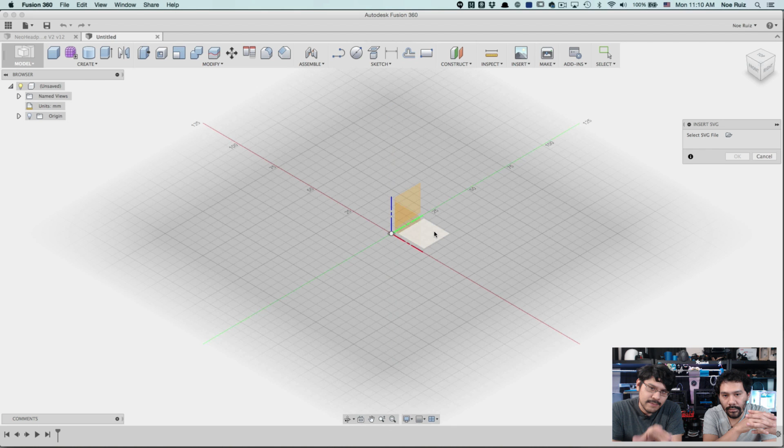Now, importing into Fusion, here's where you have to have a little bit of... here's some caveats. It's under Insert, go to Insert SVG, and then you have to pick your plane. In this case, I'm just going to pick the bottom. Next thing you've got to do is click on that folder icon right next to Select SVG File, navigate to it, pick it, and make sure it's the right one. I have a couple of them there, so make sure it's the right one.

When you hit that button, you might think it's wrong, and I'm moving it around here using that little square. That's the freeform mover. I would avoid doing that because most of the time you're going to want to do something very specific, so increment happens through the arrow manipulators. That little triangle thing I selected was the scale. You can scale it if you want, but again, I recommend doing all that before you import it.

Here's one of the weird things. I'm just moving it around, showing you what different things are to move it. I would think that moving that would have a snap feature. It doesn't snap. It probably will in the future, but at the moment it doesn't.

If you try to re-import it by clicking the folder icon, it doesn't do anything. If you clear out the values in the X and Y distance, it doesn't do anything either. So you have to hit cancel and then redo it. Just keep that in mind. If you mess around for like 10 minutes moving it where you want, and then find out it doesn't do anything, not cool.

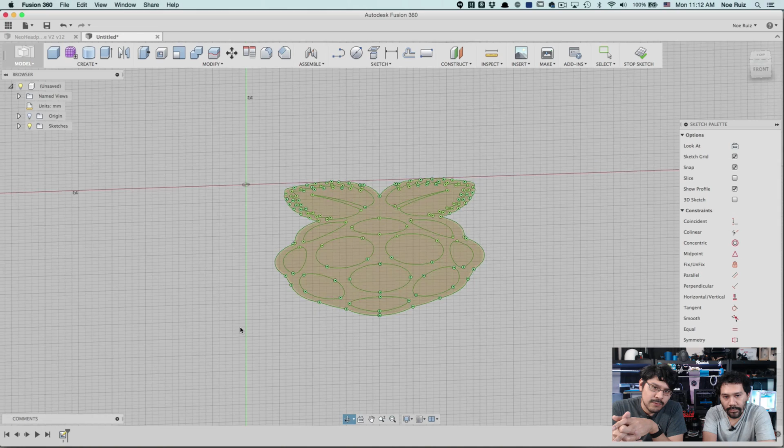Once you hit OK, you can roll over some of the features inside the sketch to make sure that it is in fact a closed and tight path. Then you can select some features and extrude them if you want.

Hotkey command is E on your keyboard, just E, that'll hit the extrude. You can type in a number. You can hit P for pull as well. I think, yeah, P for pull is... no it's not, it's actually Q. P is for 1, 2, 3D design.

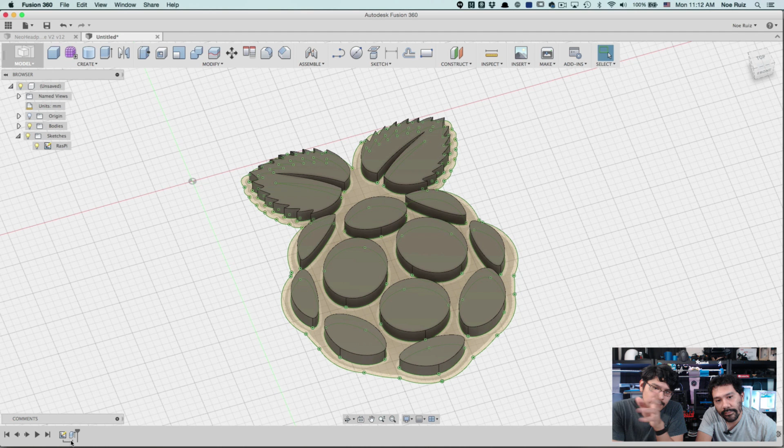Oh, that's project. Anyway, you can rename the sketch. I just named it RasPi, and then it didn't go away. You just have to bring it back, because by default, once you do it, it turns it off for you, which is kind of nice, but kind of, you know, whatever.

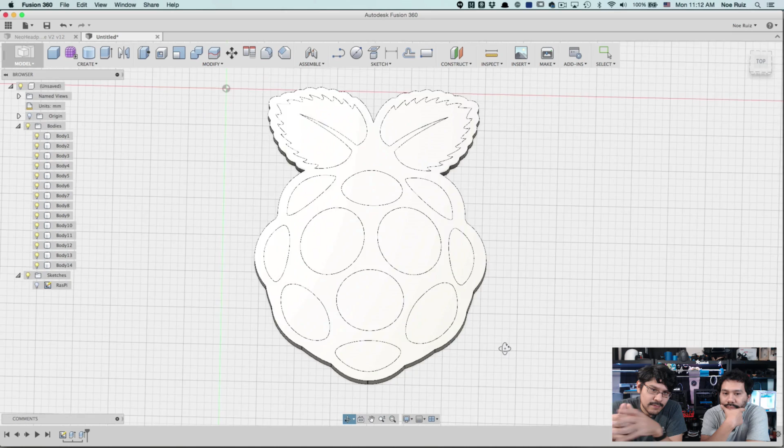If you wanted to move the sketch, let's say, into the center of that little corner thing, you can't. You can select all day long, but yeah, it's kind of annoying. It only does this with a custom SVG.

If you were to draw a path, you can move those paths within the edit sketch. Way too long, though, you don't need to do that in this case, but I just want to show you that is one of the things you can't do.

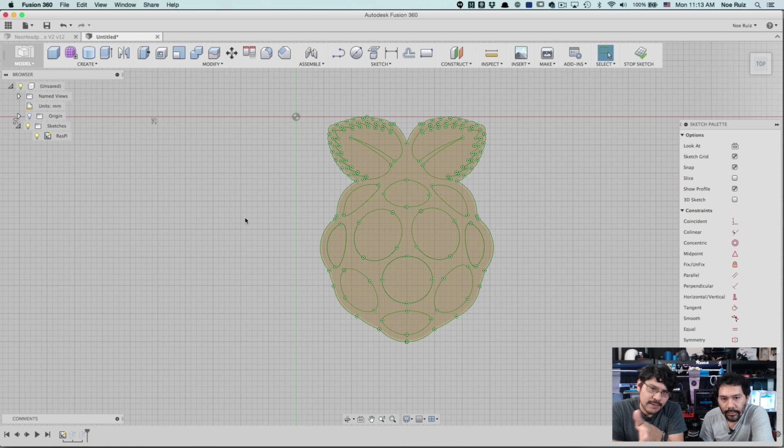So what you would rather want to do is just move your solid that you've already extruded. Go to the move icon, and instead of moving it incrementally and messing with the handler, I like to use point to point. You can just select any type of points and then drag it to a second point, not click and drag, but just click and then click again. That way it ends up in the center.

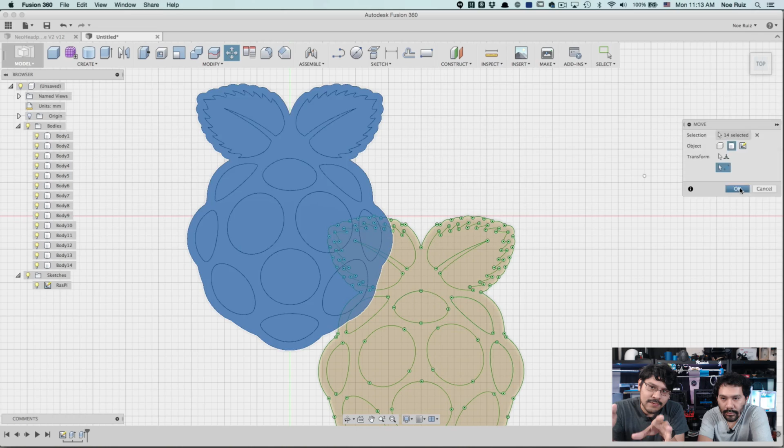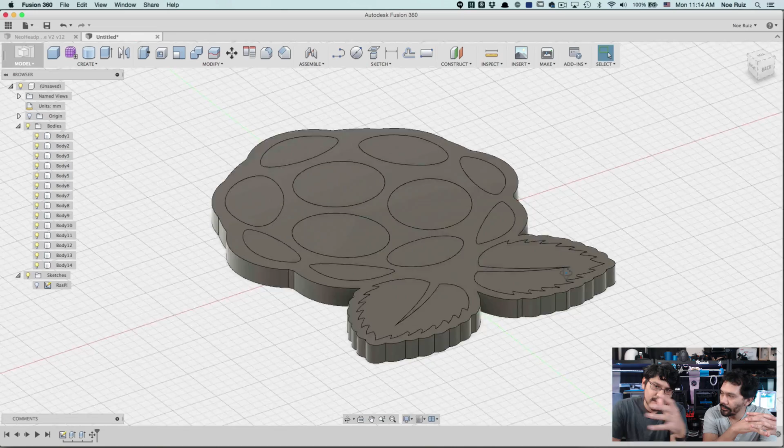So if we look at it now, it's actually underneath the grid, and that's one thing you probably don't want to do. Instead of moving it again, you can just double click on that operation in your timeline and modify it from there. The goal is to make as few operations as possible, so you don't end up with a giant assortment of things at the bottom of the timeline. You can keep tweaking that same thing, doing five steps in one.

That's one of my goals, to do as many little things so I can really make sense of the parametric timeline. You could have saved one more step too, right when you imported it, as you were moving it around. You could have just done some math right inside when you click on either the X or the Y. Click on one first, figure out the dimension for that entire thing—we already punched it in, so it would've been 20 by 20, but in this case it was 40. You just hit divided by 2 and it'll automatically move it all to the middle. That's a good one too. But if you weren't sure you wanted it centered, that's one way to move it, point to point.

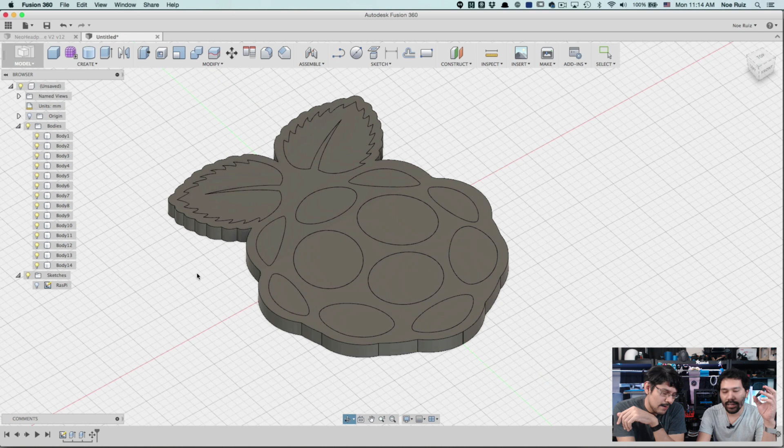Super handy techniques for getting the cleanest result. So clean, they are really clean. Should we take a look at them? Yeah, just to see how clean they are. It's pretty damn clean, yo. It took a little bit to get to it. You know, ooze shield's awesome, definitely good for things that are in the Z, but for something like this it doesn't have much Z. Doing a custom skirt, utilizing the two extruders, you can do a nice clean skirt ooze shield thing.

So there you have it, folks, super fancy, cool stuff. Yep, get on that if you guys want to make it.

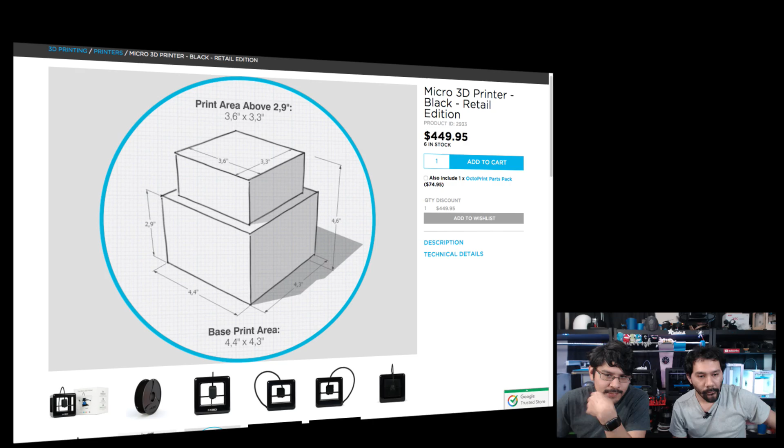Spool holder is inside there, on the inside, yeah. Removable build plate - you've got BuildTak that already comes on there.

Is it worth the money, Pedro? Would you recommend it? I think so, especially for a first timer - it's worth it especially for the price and the portability. If you're doing a trade show or a conference, you could take this around, just walking around with it. Yeah, it's just how light it is - it's crazy, pretty cool.

Okay, well we have a print here, this is Bulbasaur. You want to take it off the bed? I don't have any of my tools here, but I can bring it right here. Here's your tool - there you go, one of our favorite spatulas.

Tell me about the bed plate, what kind of build plate is it? So it's a cold build plate. Yeah, I'm not gonna get this off without... there you go. Do it over the overhead here, Pedro. Oopsie, overhead - oh, too late, I already took it off.

That's cool, it's pretty effortless especially with the tack. Removable bed is something I really like. Leveling was one thing too I wasn't too sure about, but it's pretty much the same song and dance that you would do like with a piece of paper, right?

Yeah, so one of the coolest things is it comes with a little flexible, clear build plate here. Of course, the spool is inside, you can kind of see it in there, yeah it's right in there. This is the little tiny spool it comes with, but you can use additional regular size spools. Just be sure to load it from the back and not the sides, as it will mess with the motion drive system on here. So that's the only little thing you got to look out for.

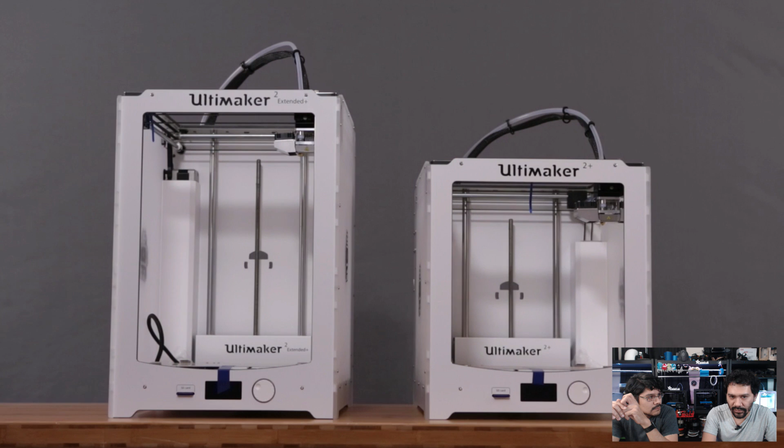Super nice. We've been testing this already with 1.75mm filament and it works pretty good. All you got to do is increase the temperature up to, I think, like 245 to 250, and it flows perfectly.

Okay, how about the tensioning in the feeder? There's the feeder right there, folks. For one of the tests I left it right where it's at right now, which is right in the middle, and it worked pretty well. But you've updated it too, right? Like to the second notch, I believe, or the first notch? One of the other ones I did, but I don't think I needed to. So definitely just test that out on yours, depending on how the guys over at Fabricate have assembled it.

So there it is, that's our unboxing video. Let's take a look at some settings. So you've got some material profiles, it looks like there's an updated firmware inside there. So you have a per-temperature adjustment for each nozzle, which is pretty cool.

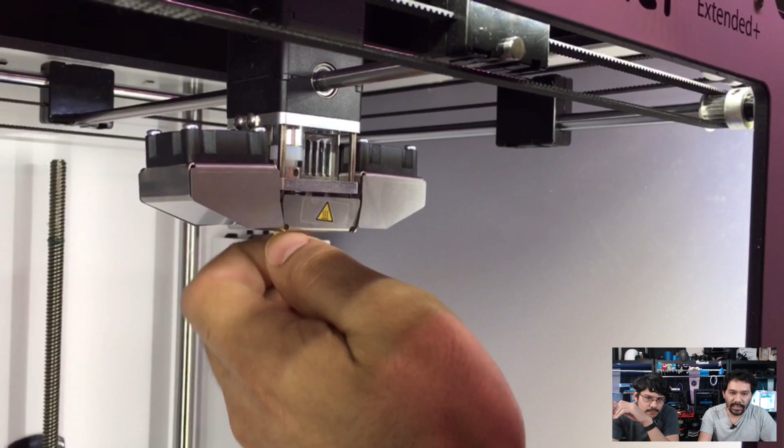And like we were saying, it's easy to swap these out. They include a little wrench there. Which one do you have on it now? I think I have the 0.6 millimeter on there right now.

Does it help with the 1.75? Yeah, seems to have helped, but I think it was probably just the temperature increase that made it flow a little bit better. Okay, so we'll be testing this more, testing out the different nozzles.

Yes, we've had it running for a full, about almost 4 hours? 12 hours now. 12 hours? Yeah. So again, we're shooting this on Tuesday, we got this literally out like Monday at 6 p.m., something like that. Comes with all the tools you need to put it together, non-stop, yeah.

Okay, cool, included. If you folks already own an Ultimaker 2, I think not within a certain period, they do include the Olsson block kit, and all the ones that we have in stock at Adafruit already have the kit. You will get that. Cool, coming soon to the Adafruit shop. Yep, the Plus.

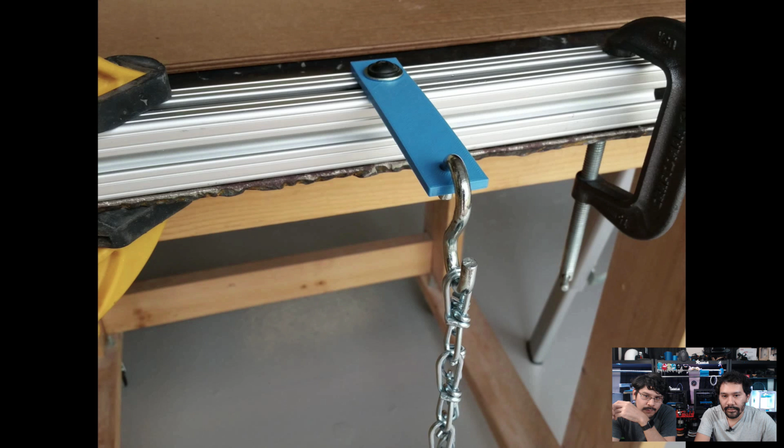So here's the deflection test, testing out normal PLA, trying to see what kind of load it can handle. This is just a bucket. There's the test piece at 100% infill.

So testing sort of a bend strength here. This is regular PLA, just filling up a regular bucket with water.

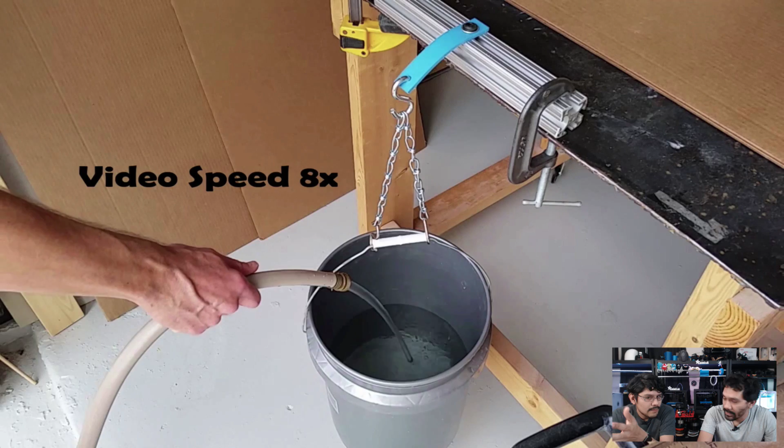One of the other cool things we've seen around the web is some people using acetone to weld things together, and it works on the PLA PHA. Normal PLA does not work with acetone, so you can't finish it or weld stuff together.

But it's a lot, okay, so it failed there at 28 pounds. Here's PLA, and let's talk a little bit while it's doing that. So I had some testing sanding it, and I found it a lot more smoother and more forgiving for sanding, so you're not going to have all these sharp edges. It's a little bit more flexible.

Yeah, you can see it here. It's not breaking, it's flexing. In fact, it doesn't break at all. He fills it up to the top and it doesn't break. I think it goes up to 43 pounds and it doesn't break, it just bends. So really cool.

So that's pretty much it. I love his pigment colors of choice too, he's got really nice saturated, some nice bright colors. Yeah, got some glow in the dark too. Actually not really that saturated, more like he's got glow in the dark.

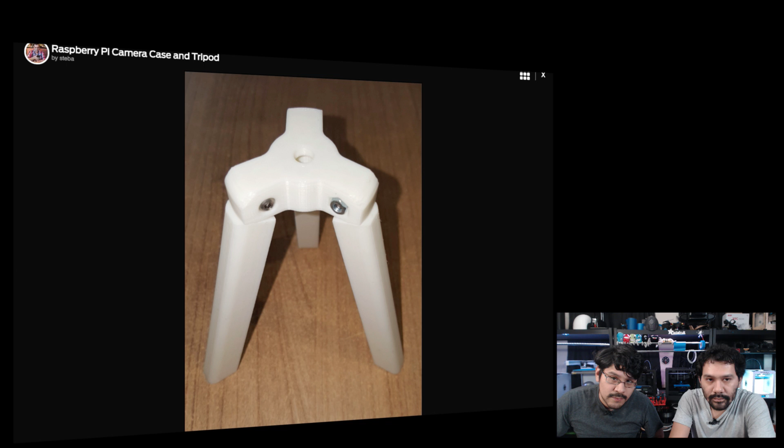Next one, this is from Paul, printed out your Mario Boo planter. Here we go, we got some stuff here. Printed out without any problems, had some layer adhesion problems on the base layers. This has been solved by printing with a raft at 0.4 air gap. This was caused by my printer and not the file - that's good to know. Printed on his Hictop i3 with Hatchbox blue PLA, and he painted it. I like that, I don't know how you get that sort of effect on the surface, it looks like the layer height or something like that, but it looks pretty cool, it just looks interesting. It gives it that extra texture to it.

Huh, pretty cool. Next one.

This is from Alice Soto. I see her name pop up a couple times on Wearable Wednesday. She's got a couple questions for Becky, and she printed out Link's sword. This thing came out really nice. She printed it on her Printrbot Simple. It's just to show you that you can print big stuff on small printers. Just connect the pieces together, and it should work out.

She says, I printed it in glow-in-the-dark filament with Filament Outlet. The grip of NinjaFlex broke in the middle, probably a slicer error. Super cool, she has a Printrbot Simple, and she printed it white. That's pretty cool, very cool. Shout out to you, Alice. Thank you so much for making it and sharing. Hope you enjoy it and slash some evil villains with it.

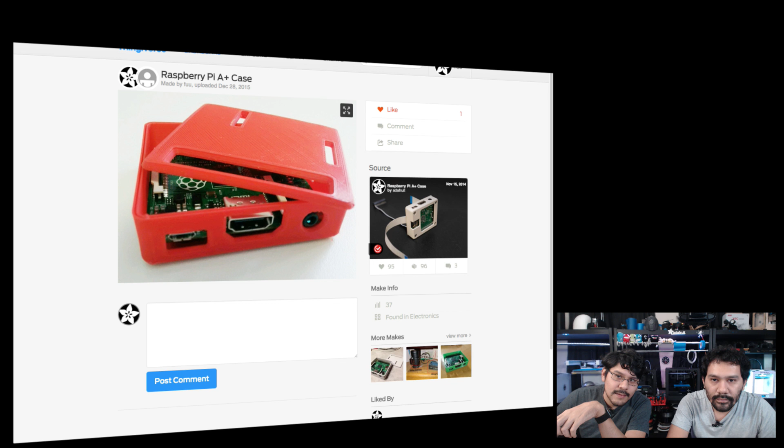One last one, I think we got. This is one of my favorite ones. I'm not sure this young maker's name, but he's a young maker, and he posted this. Somehow I found it on Twitter. Pimoroni actually retweeted, I think his mom, that shared it. This is awesome, so he goes through his whole experience. He sent the file to his mom, who printed the STL at work. She has an Ultimaker at work, so they were able to print it at work on straight glass.

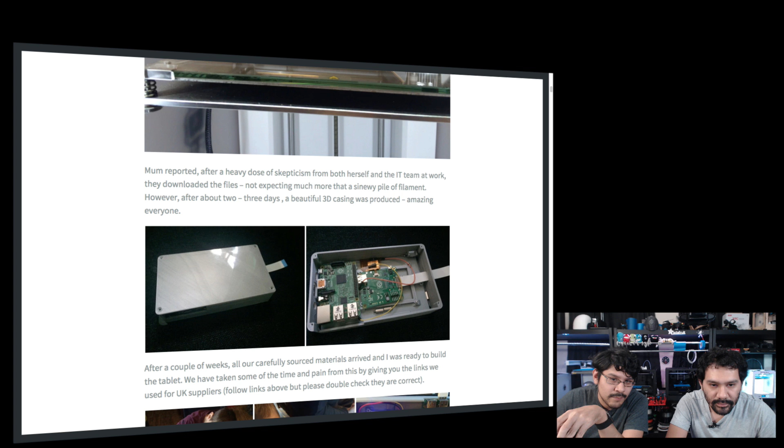The thing's looking really clean. Here he is right there, assembling it, putting it together over the holiday break. Very, very empowering project for him. He talks about all the things that he learned about it. Learned so much, very, very awesome. This is what really keeps us going, seeing that people are learning from it, being empowered to feel like, you know, I can build anything now. I can design my own thing, I can build my own electronics. Very, very cool stuff. Big shout out to you, sir.

Especially since it's a design I really like, and he learned a lot from it. Invaluable learning experience, building, getting all that experience in electronics and 3D printing. Every time I pick it up, I feel a sense of pride and wonder that we didn't just buy this from the shops, but produced it ourselves. And that's the whole point about these projects, to really empower you guys to see the world differently and be like, man, I can design some stuff. And coming from a kid too, that's a lot more gratifying than having, you know, like a middle-aged person. I love what the middle-aged are doing, but it's empowering for our kids, their futures, to do it.

Very cool, he's also playing with the Kano OS. His favorite thing, I think, was like the keyboard. Yeah, I think his favorite thing was playing Minecraft without any wires like that. So it's very cool. All right, shout out to you, sir. Thank you so much for sharing your experience. Keep on making.